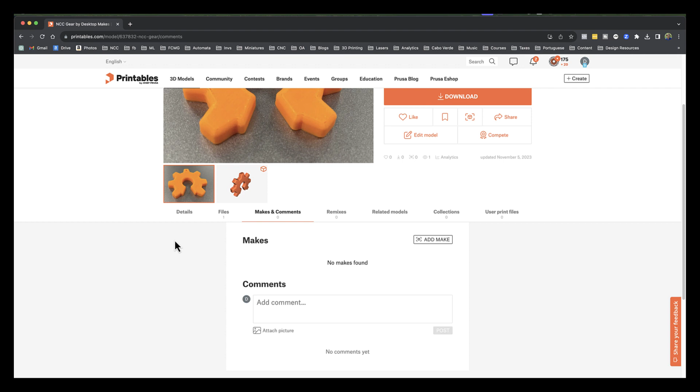Now, these are the main three tabs you want to take note of. Okay, let's click on the Details tab here, and over here you've got some instructions that we're going to follow in order to recreate this part.

So I can see here it says carefully follow these instructions. Print the gear on the flat side on the build plate, the side with no rounded corners. And if we take a look at the picture here, you'll notice that it's got a fillet on one side and the other side is flat.

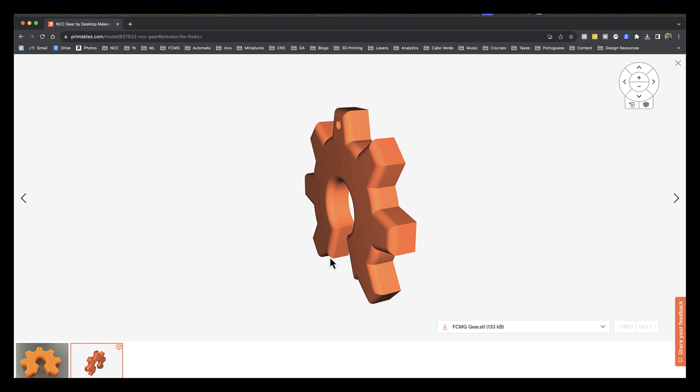Other image on the right here, we can see that we have a 3D viewer option that pops up, and if we click on that, you can actually take the model and rotate it around. So here we can actually see that it's got a rounded side here, and on the back it's flat. So this is a nice little addition to the website here, that you can actually orbit around the part and get a closer look at all the different sides in more detail.

Okay, I'm going to click on the X here on the top right to close it. Let's take a look at some of the additional instructions. It wants us to scale to 50%, set infill to 10%, set the material to PLA, set the printing resolution to 0.25, and it says after printing, show model to the instructor in order to be added to the 3D printing certification list. All right, let's do all these things.

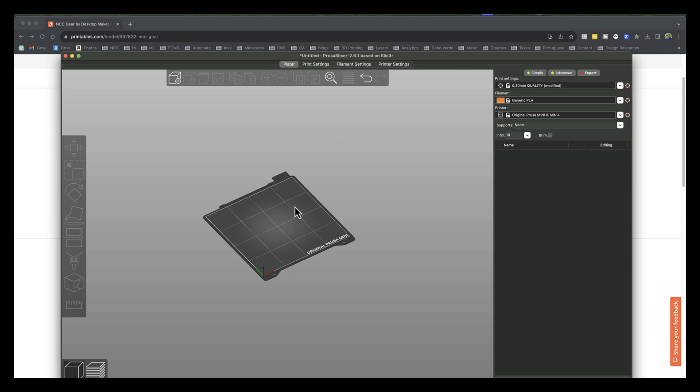We'll open up PrusaSlicer on the laptop, and the icon looks something like this. And here we're going to bring in our design by clicking on the little add button here on the top toolbar, and then we're going to navigate to find our STL file and then click open. And it comes in this orientation.

Now I'll briefly go through some of the main menu items here. If I click on the model itself, you can see it turns green. I've got a top menu bar and a side menu bar here.

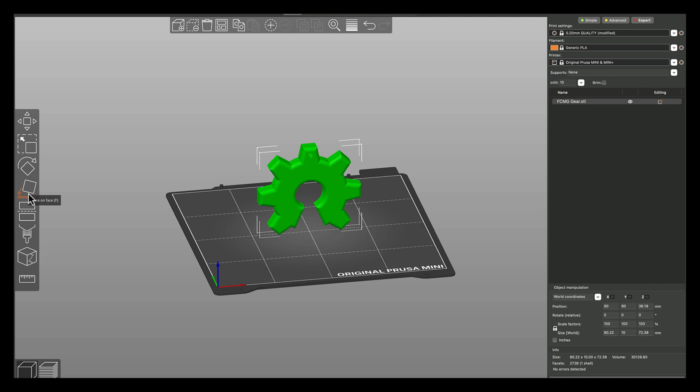Now the first set of instructions says to print the gear with a flat side on the build plate. So let's go ahead and do that. If I click on the gear, there's a button here on the left side that says place on face. And if I click on that, you can see that it looks for all the flat faces and highlights them, and all I have to do is simply click on those to get it to position on the build plate.

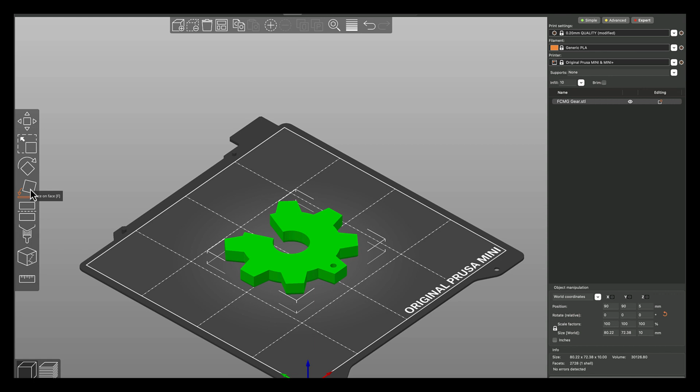So if I click on here, it'll lay it flat, but you can see the problem there is that's not the flat side, that's the rounded side. So if I click on it again, the place on face, if I click on one of these top faces there, you can see it went upside down. Again, not what I want, and in fact I want this face here to be on the bed, so I'm going to click on it one more time and choose that side.

So all you do is click on the face that you want and it'll orient it right on the bed. Perfect. Let's go on to the next item, which says scale to 50%.

The easiest way to scale is to click on the model, and you'll get this box over here. One thing to take note of is this lock button—if it turns orange when you click it, that shows whether it's unlocked or locked. That's the button to keep your scale factor in place and not distort the item.

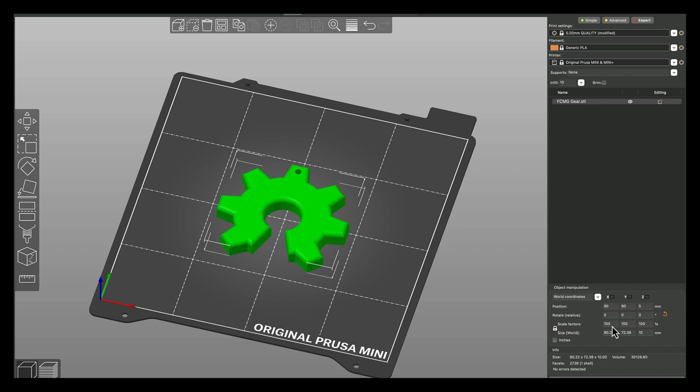Now I can scale by either choosing a percentage or giving it a specific dimension here. Because this button is checked to keep the aspect ratio, I can click on any of these fields and scale it. If I wanted to increase it by 200%, or 2 times the size, I can type 200 on the X and it'll scale it. I can click the undo button to undo that.

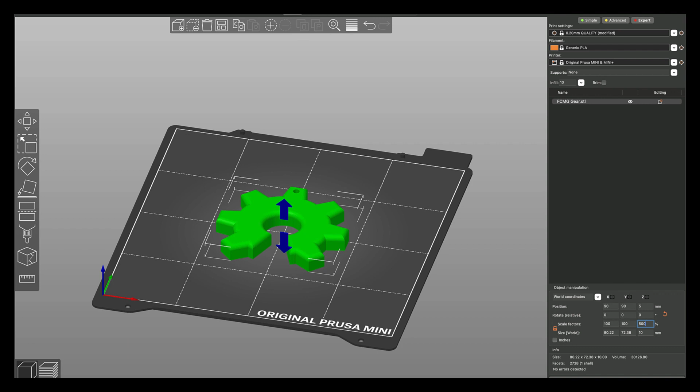Now if I have this button unchecked and click, let's say, in the Z direction—let's make it really obvious—I'll say 500%. You can see that it distorts it. It allows it to be thicker, but only changes that specific direction and not the rest. Okay, let's go ahead and do that.

The other option you have here—I'm going to go ahead and click to close the little lock there. Most of the time you're going to want to keep that aspect ratio.

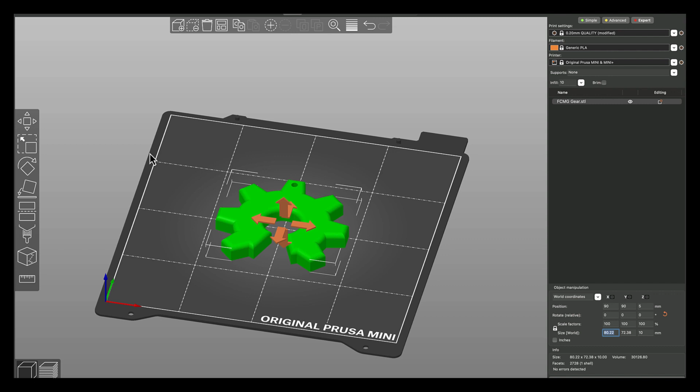If I know I want this to be a specific size, let's say in the X direction—X is your red here in the front, Y is front to back, the green direction, and Z is your blue, up and down.

Let's say I wanted this to be a very specific dimension, like 95 millimeters in the X. I can go ahead and click on that or type it in, and you can see it'll scale.

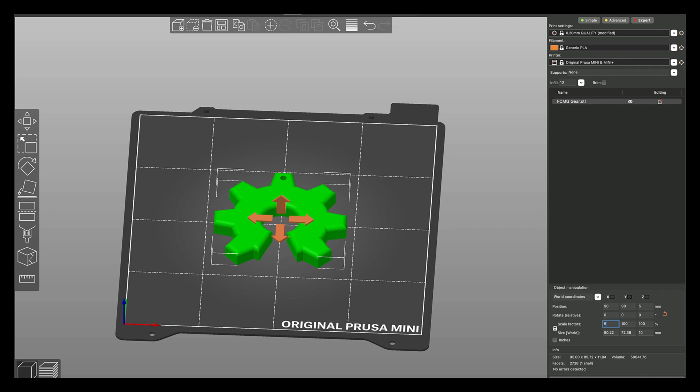Let's undo all that and bring it back to 100%. The scale factor required by the instructions was 50%, so I'll type 50 and hit enter, and it's down to 50%. I can see the size there—if I look in the Z direction, that's 5 millimeters tall. You also have the option to change it to inches by just clicking on the inches box here.

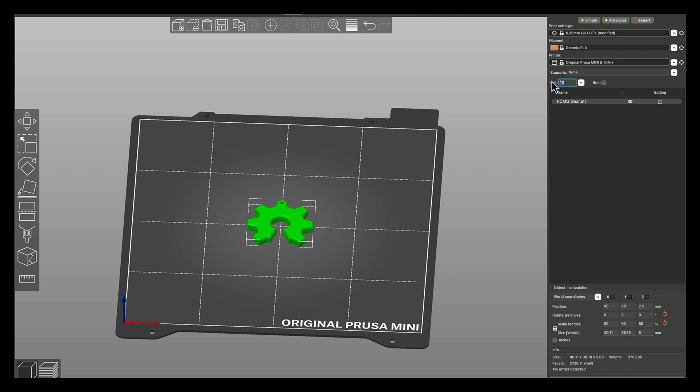The next instruction says to set the infill to 10%. To do that, we go right here where it says infill. We can click on the drop-down arrow and choose one of the preset infills, or just type one in directly. I'll click, choose 10%, and there we have it.

Let's see what the next option is: set the material to PLA. To do that, I'm going to click on the material, or filament, drop-down area, and choose generic PLA. Okay, and now that's set.

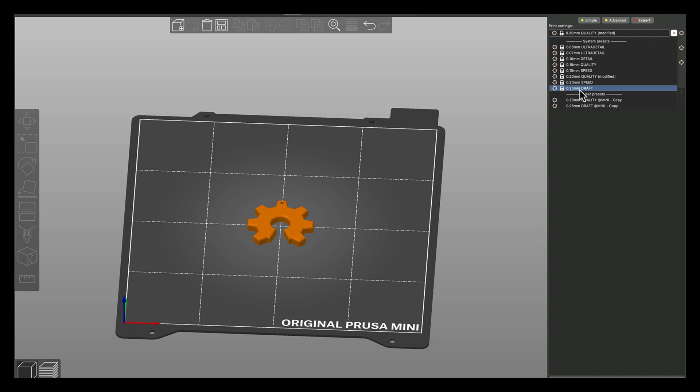Let's look at the next option: set printing resolution to 0.25 millimeters. We'll go ahead and change that as well. To do that, I'm going to go to print settings, click on this little drop-down arrow, and choose one of the predefined resolutions. I can see right here 0.25, that's the draft setting. I'll click on that, and after completing my settings, I can click on Slice Now.

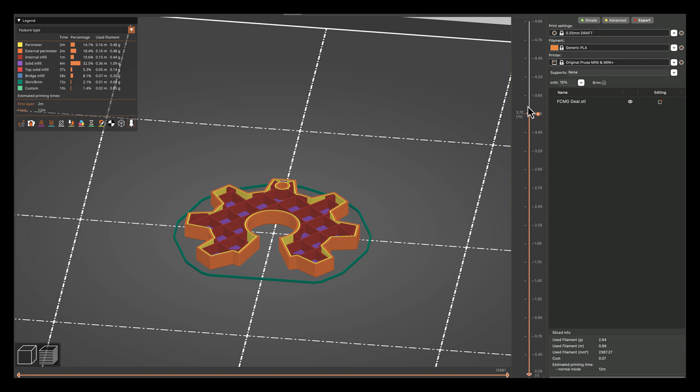Let me zoom in a little so we can see the different layers. It's always good practice to take this slider, bring it down, and this will show you layer by layer what the model is going to look like as it prints. It's a good idea to do that because if there are any errors, it's a lot faster to catch them here than to find a failed print.

Okay, now we can click on Export G-Code, and you're going to save it to the SD card that you'll grab from the printer and insert into the laptops. After saving it, you'll eject the SD card, bring it to the printer, and we can print our parts.